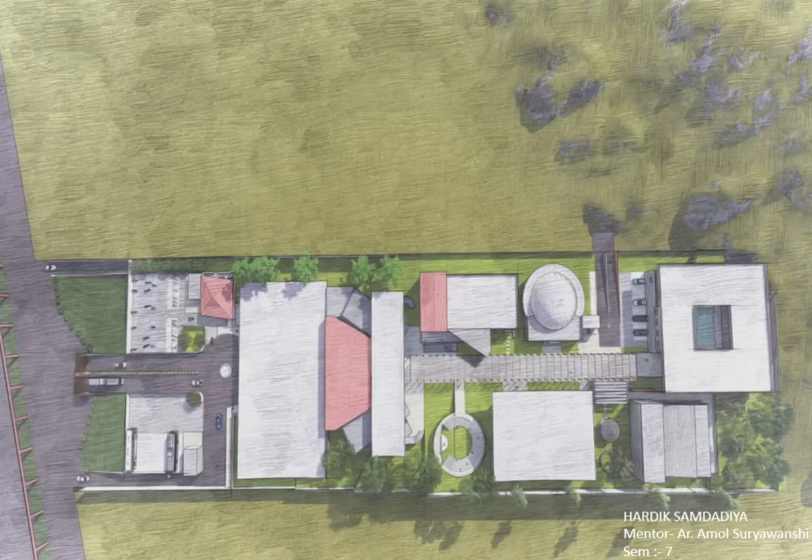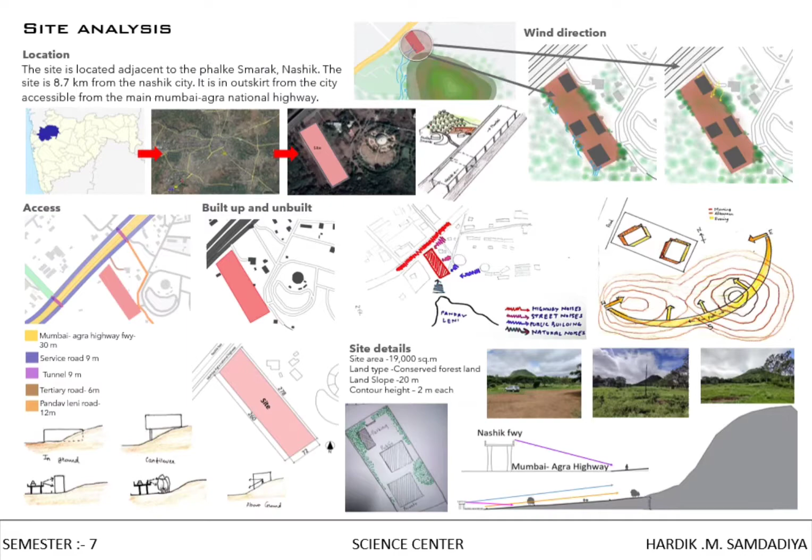The site has Mumbai-Agra National Highway flyover adjacent to it and Phalke Smarak.

The concept I have taken in my design is forming relation with science, that it should be interactive, innovative and future vision, as the space should create a new experience throughout the spaces from inside to out, merging with the surrounding mountain.

As designed in the plan, the 12-meter wide road leads to the main entrance of the science center where the buffer space is created, which leads to the admin block area and the food court space, where the admin block has the necessary admin areas with the waiting area and display area unit.

As we move forward, for the upper level contour, I have provided a staircase with ramp which leads to the exhibition space where the double height volume is created. As the central tension space, on both sides the ground floor exhibition space is provided, above which the external staircase leads to the first floor exhibition space area, and again a staircase with ramp is provided to arrive at that exhibition space.

From the exhibition space, we lead to the museum area space, where the museum space has G+2 floors, and in front of it the amphitheater seating is provided, with a ramp forming to arrive at that space.

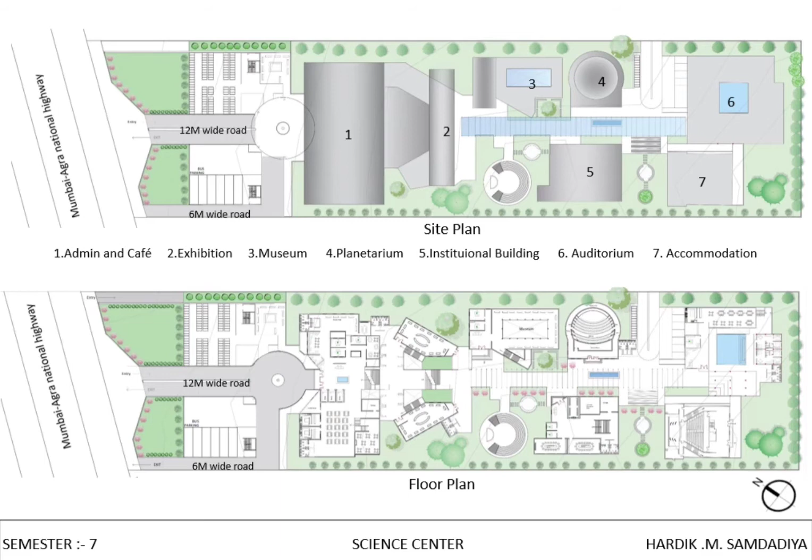The roof used is the curve roof, forming curve from inside to out, creating free flow looking towards it.

In front of the site, at the main entrance, the use of contours is formed by keeping it intact and forming a natural sloping garden above it, which leads to the entrance of science center in the realm of nature.

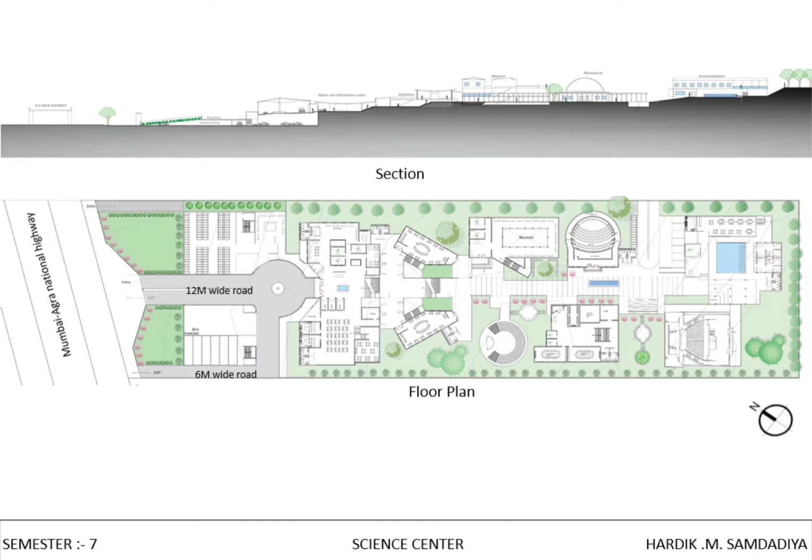These are the individual level plans where the first plan has a single entry at the ground level, arriving at the four-wheeler parking space with the central exit space, and at level 2, two meters, there is parking for two-wheelers, bicycle parking and buses parking, with the necessary two staircases and two lift blocks to arrive from the ground floor to level 2.

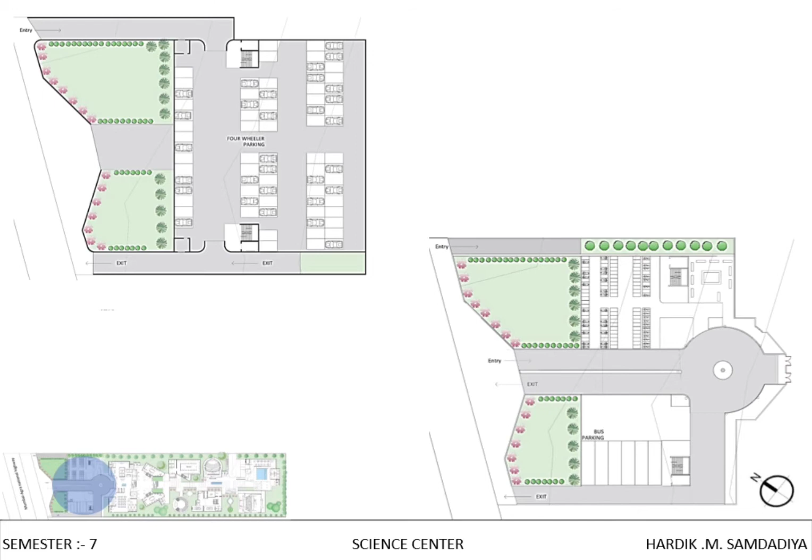As we move from the buffer space inside the science center, on the left there is an admin block space with a central skylight provided, and there are also waiting areas, the services and the display area provided for the information of science center.

On the other side there are shops and the dining area with food court facilities of restaurant and coffee provided with the necessary services.

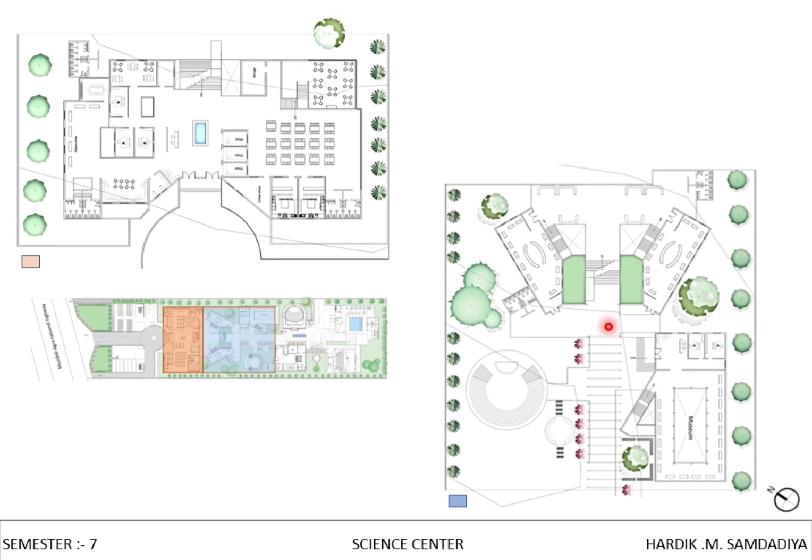To arrive at another space, I have provided a staircase with ramp to achieve level 8 meter, where it has access to the exhibition space area at the ground level and the G+1 area, where again the staircase with ramp is provided for the further museum space and the amphitheater seating.

From the museum space, a series of pergolas with glass roof leads to the institutional building space and the planetarium, where the institutional building has activities of conference room and digital area with workshop at the ground level, and at the first floor there is a library and classroom space.

As we move forward, the series of arch pergolas leads to the end of the site with the accommodation space and the auditorium space, with the secondary road connecting to it.

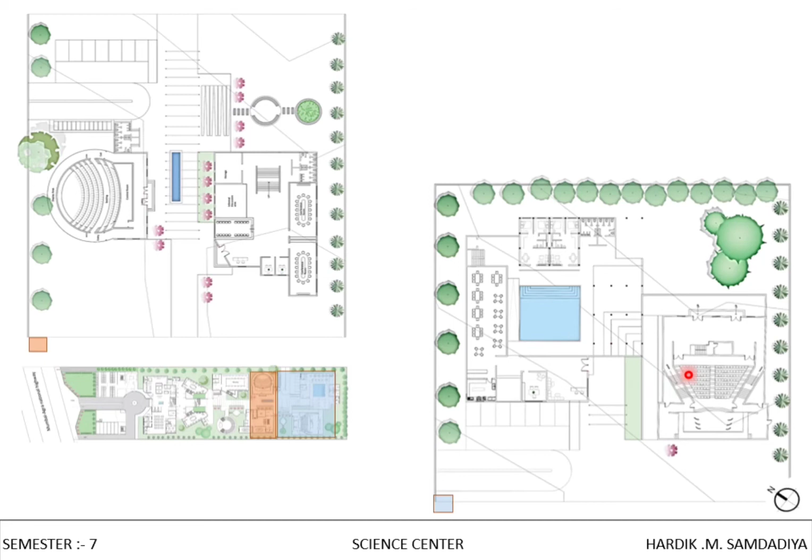The museum area plan has ground floor plus 2 floors, where the ground floor and the first floor are the museum space active display units, and at the second floor there is a workshop space provided with the central skylight for ventilation.

The educational institutional building has at the ground level the conference room and the digital workshop space, and at the first floor there is library space with the classroom with the necessary natural services.

At the exhibition space, the ground floor and the first floor are oriented perpendicular to it, forming an angular arrangement with the external staircase leading to the first floor.

The accommodation space unit has at the ground level the dining and kitchen area with the swimming pool, and at the first floor the staff quarters above it.

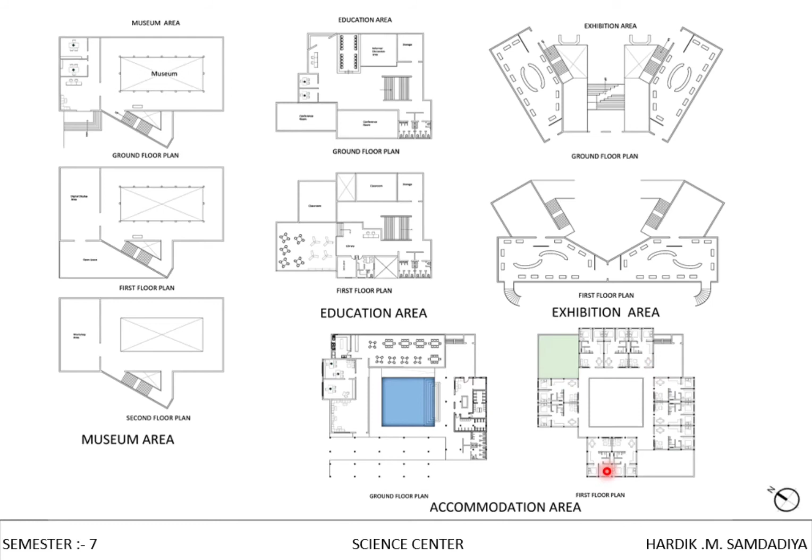Exhibition space is there on both sides of the central axis with the staircase with ramp, and at the first floor there is again the perpendicular stacking of exhibition provided, with the central skylight forming natural ventilation within the space.

The second section is of the museum space and the amphitheater seating, where the museum space also has a central skylight which forms natural ventilation within the structure.